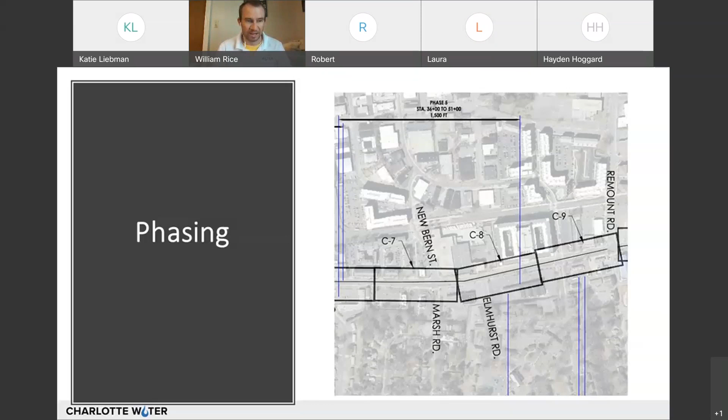If you look at this map on the screen, this is the phase 5 line, with a little bit of overlap. The difference between the two phases is not the same line. There's typically a large 24-inch valve there, and we build up to that valve. We're able to isolate that line, put the new line in, and put the old line out of service. That's what the phasing is based on - it's based on where the intersections are, how we keep from closing too many at the same time, and how the 24-inch valve allows us to activate, isolate, and move on.

Real quick, traffic detours and alternative routes - this will be posted as well, you can come back and read a little more. The crux of it is, if you are northbound on South Boulevard, you'll be able to access Marsh Road and Elmhurst Road right now.

You will not be able to turn left onto New Bern - Marsh Road turns into New Bern, so you can't turn left onto New Bern if you're northbound. If you're southbound, it's sort of the opposite - you'll have access to New Bern but not to Marsh or Elmhurst. So if you're wanting to go on Elmhurst, you need to be going northbound, and if you want to get onto New Bern or go west of the project in the corridor, you have to be going southbound. That's basically the crux of it.

We did find a problem with our detour. We had a detour set up for the neighborhoods on the west side to get around the whole Marsh New Bern barrier wall. The original detour was putting people out on Hartford, and I received a phone call - thank you to the public person that called me to let me know that when you come out on Hartford, it was not possible to turn right and then make the immediate U-turn at the QT because there was a small bit of median there. So we've since made that fix.

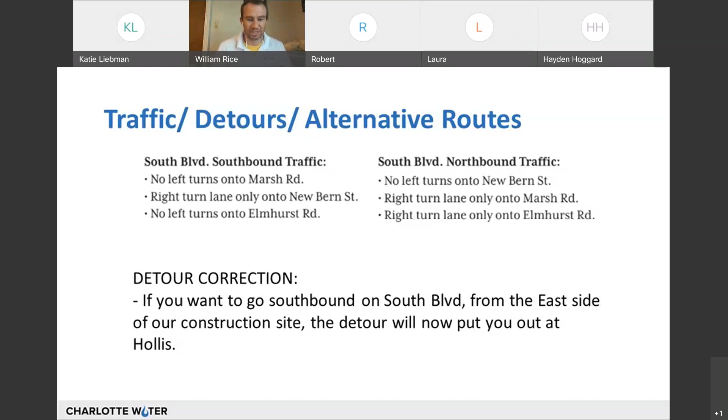We know that this construction is pretty disruptive, so I'm trying to make it so that in the future there won't have to be any extra road closures for development to happen. We think there's going to be multi-story development on anything that's single story on South Boulevard right now, so we're installing this capability to have that development happen a little better without as much disruption.

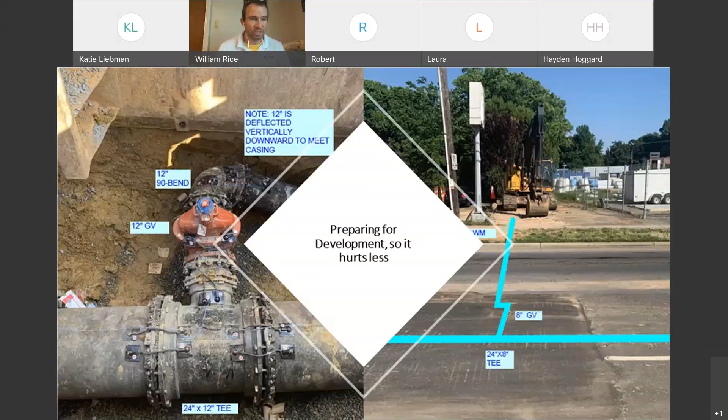Okay, I mentioned buried utilities earlier. Typically we call 811 before we dig, as everyone should, and Piedmont, Duke, and any communications companies will come out and put markings on the pavement. You've seen the spray paint in many different colors.

Each different color represents a different kind of buried utility. Once we know where the buried utilities are, oftentimes we'll go do soft digs. We've mentioned that a bunch in previous meetings. We'll gently excavate to really confirm that's where the utility is, so we're on the same page and doing extra due diligence.

Even with all that, sometimes utilities don't get marked, and then we may hit them, and that causes problems. But if all goes well and we don't hit the utilities, oftentimes we still have to figure out how to...

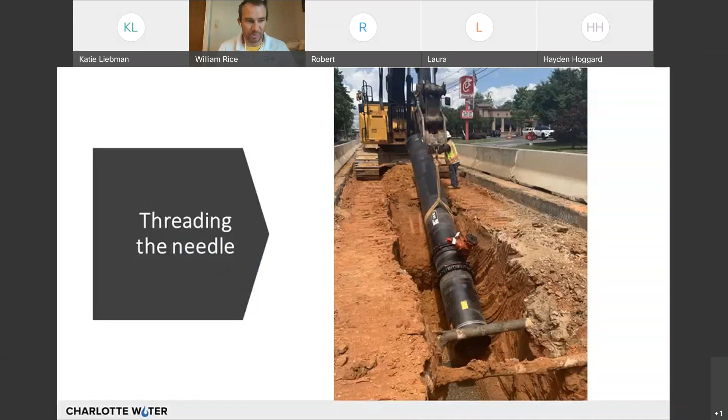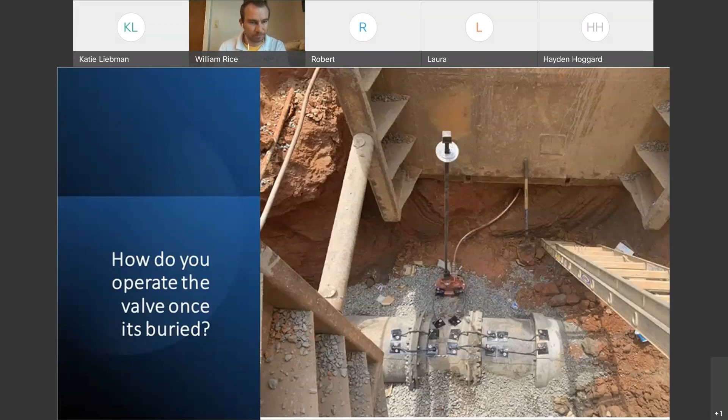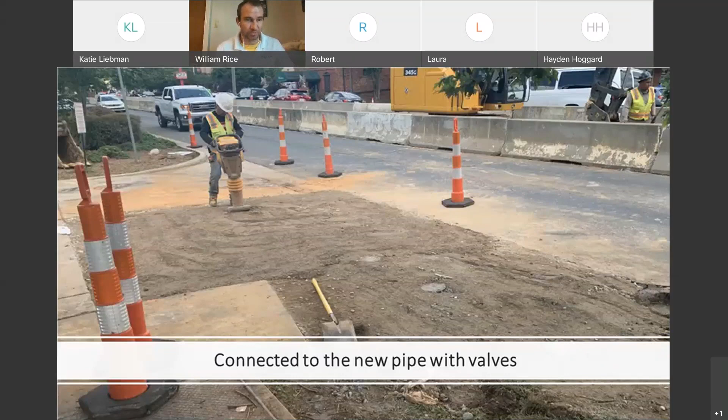But we eventually backfill all around the pipe. This is sort of a side connection - there's actually a pipe that runs from our construction site, under this open lane of traffic, over to here. You can see he's using the vibrating compactor, compacting around these valve boxes and everything before we do final pavement restoration.

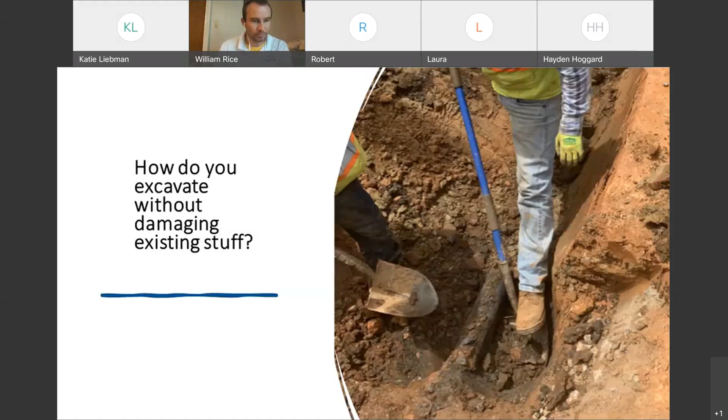What about the old water line? That's a question that comes up - what happens to it? So what we do is an abandonment of the old water line, and there's a couple different ways you can do abandonment. We've opted for the way that's going to be least impactful. Rather than going into that existing open lane of traffic, where the old water line is, closing it and digging up the old pipe to throw in a dumpster, we're pumping flowable fill, which is sort of a concrete type material, into that pipe.

You may have seen in the sections of road where we were doing our work, we had some temporary lane closures last week and the week before. We're basically replacing the water in the old line with concrete, so the road won't have any impacts, and no one will attempt to put water in there. If anyone ever digs into that water line, it's full of concrete, so it's understood that it's no longer a water line. This is how the abandonment process works.

It's the least disruptive way to do that. We're just pumping concrete into the old water line and leaving it in place. We, of course, remove all the old fire hydrants and valve boxes as well, so there's never any confusion about what's active and what's not.

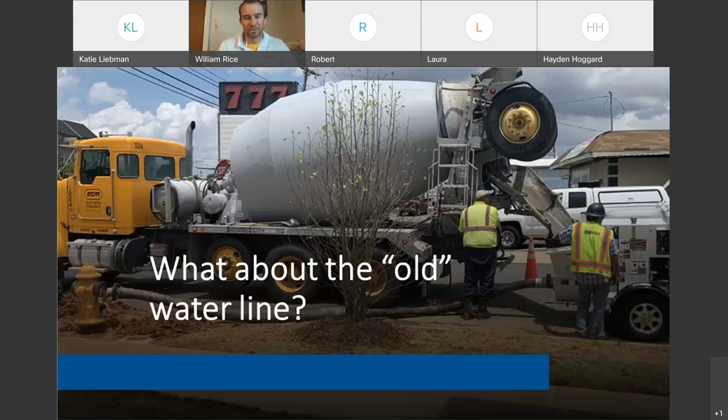We mentioned earlier that we're putting in new water lines that go underneath the existing lane of traffic. A question comes up: how are you closing one lane of traffic, but not the second lane? We recognize a full block or full road closure would be extremely disruptive in the South End area, and that's just not something we wanted to do, CDOT wanted us to do, or really anyone wanted.

Sometimes we drill from the middle out to the outer edge. Either way, that outer lane of traffic stays open while we essentially make a little small tunnel between the work site and the shoulder, so that all the traffic can still stay open, at least to one lane.

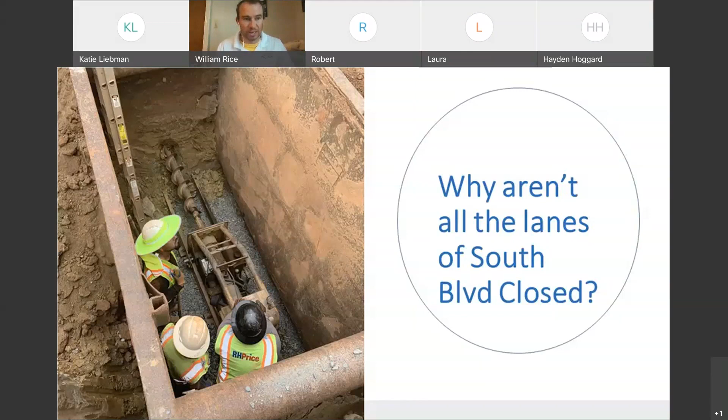I think that was my last slide. There's a question - John had a question about the traffic signal at South Boulevard.

My last conversation with CDOT was that they're up against a problem with being able to maintain pedestrian crossing there at Marsh New Bern. That was one of the imperatives. If you look over there, you'll see there's a gap in the barrier wall so pedestrians, especially for ADA handicap accessibility, the crosswalks need to all still be maintained. So that traffic signal has to balance the pedestrian request to cross the street along with regular traffic going straight, and occasionally traffic turning right.

That's why it's not just staying green constantly. I'm still talking with CDOT to see if there's any better way around that - that issue might get worse as we go north - but right now they're stuck against their operating procedure, which is that pedestrians still need to be able to get across, and cars need to turn right as well. I'll definitely keep you up to speed if anything changes.

I drive through this construction site every time I'm going anywhere, so I do recognize that getting stuck at that red light is especially frustrating, especially when there's no other cars turning right. Sometimes pedestrians come up, push the button, and cross anyway, and then they're gone by the time the light turns red. You're like, well, why is it turning red? Yep, I hear you on that.